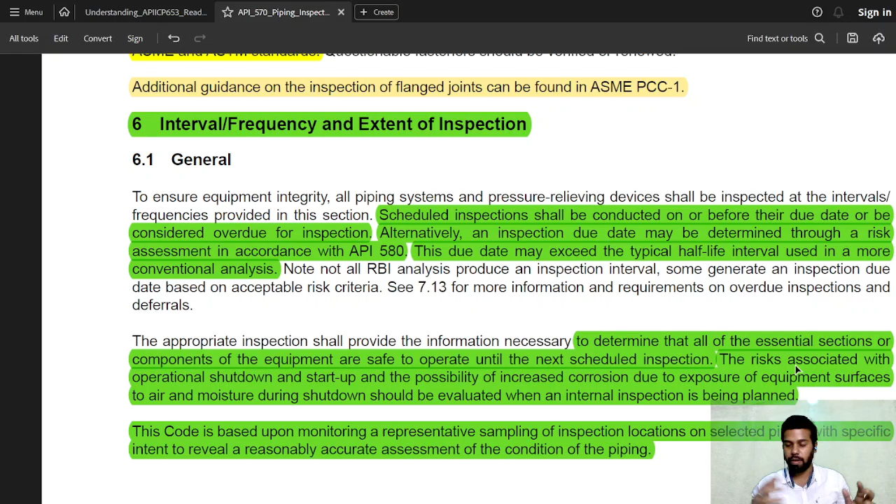The appropriate inspection shall provide the information necessary to determine that all of the essential sections or components of the equipment are safe to operate until the next inspection cycle. The risk associated with operational shutdown, startup schemes, and possibility of increased corrosion due to exposure of equipment surfaces to air, moisture, soil, or anything else, should be evaluated during the internal inspection. This code is based upon monitoring and representative sampling of inspection locations on the selected piping to reveal a reasonably accurate assessment of the condition of the piping system.

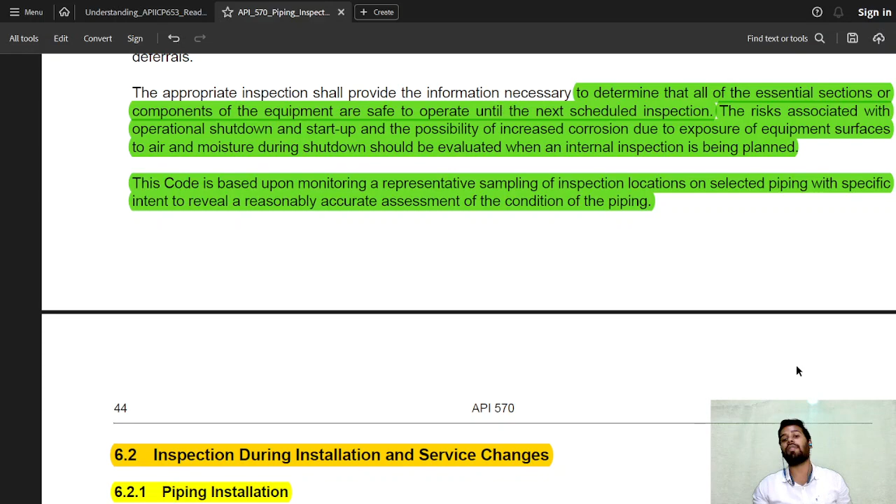Inspection during installation and service changes. Whenever the pipe is getting installed, first we have to check it, because this will be considered the original condition of the pipe, and whatever degradation happens later on will be assessed by comparing the original condition at installation with the condition after some years of service. The original inspection is very important. It initiates plant inspection records.

Piping shall be inspected in accordance with the code of construction requirements at the time of installation, because at the time of installation it is not an in-service pipe, it is a new pipe which is generally governed by the construction code. In most cases for pressure piping, it will be B31.3.

The purpose of installation inspection is to verify that the pipe is clean and safe for operation. To initiate plant inspection records for the piping system, the minimum installation inspection should include: verifying that the pipe is installed correctly, correct metallurgy is used, supports are adequate and secured, exterior attachments such as supports, shoes, hangers are secured, insulation is properly installed, flanged and other mechanical connections are properly assembled, and the piping is clean and dry for operation. We also need to verify the pressure relieving devices satisfy the design requirements - that is, correct devices used, correct set pressure, etc., and they are properly installed.

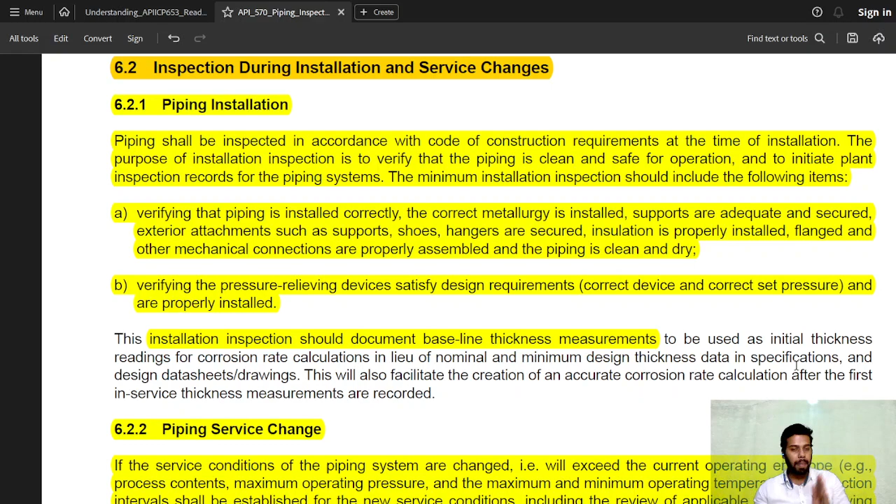Next is piping service change. If the service conditions of the piping systems are changed, that is, will exceed the current operating envelope - process contents, maximum operating pressure, maximum minimum operating temperatures - inspection interval shall be established for the new service conditions, including the review of the applicable pressure relieving device settings.

If both ownership and the location of the piping are changed, the piping shall be inspected before it is reused. Also, allowable service conditions and inspection interval shall be established for the new service.

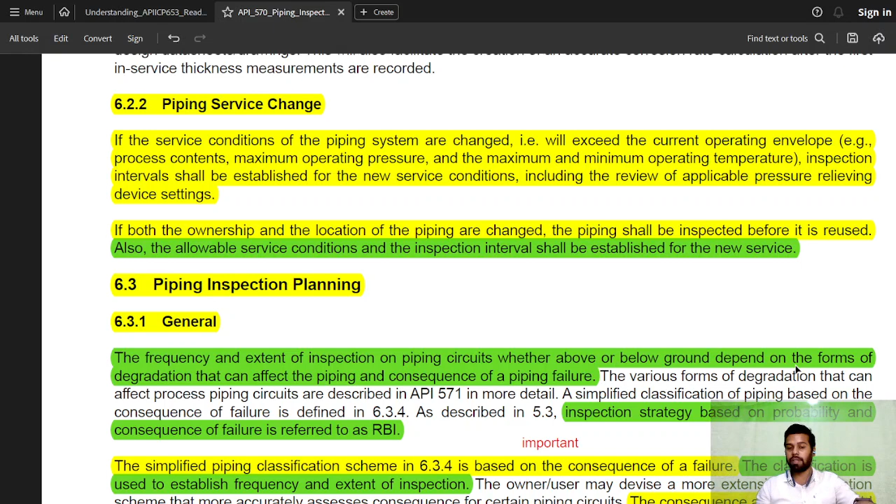Next is piping inspection planning. Obviously, before doing anything, planning is important, because if you don't do planning, then we are just shooting in the dark. Planning is always important so that you can understand whether your planning stage assumptions were properly identified and controlled or not.

So the frequency and extent of inspection on a piping circuit, whether above or below the ground, depends on the forms of degradation that can happen on the piping and the consequence of the piping failure. So what kind of damage mechanisms are associated with that piping system, and what would happen if the loss of containment happens? The inspection strategy based on the probability and consequence of failure is known as the risk-based inspection approach.

The simplified pipe classification scheme in 6.3.4 is based on the consequence of failure. The classification is used to establish frequency and extent of inspection. The consequence assessment would consider potential for explosion, fire, toxicity, environmental impact, and other potential effects associated with the failure or loss of containment.

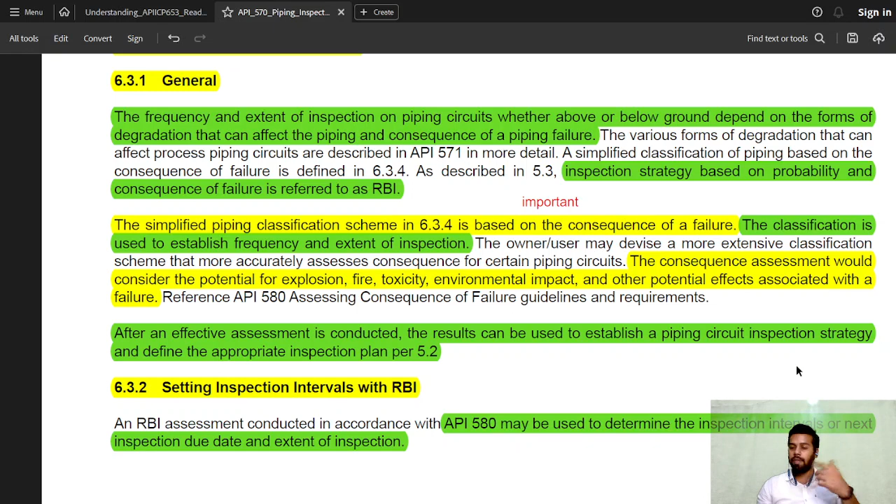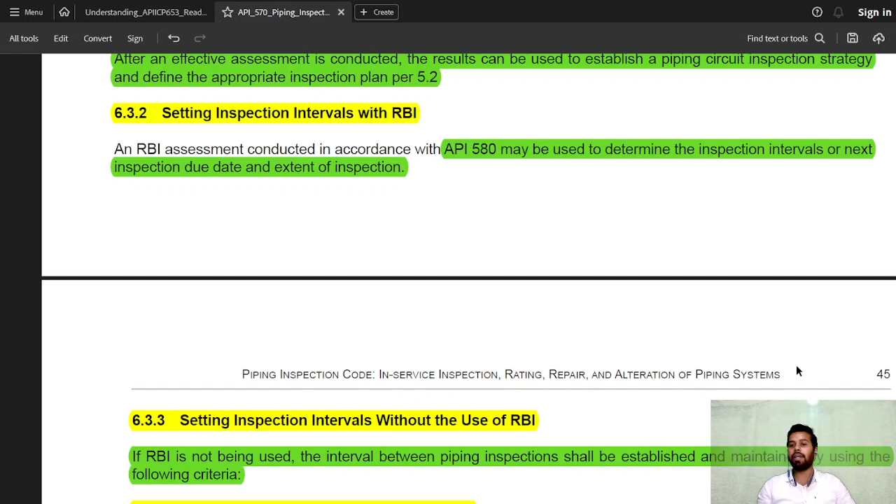After an effective assessment is conducted, the results can be used to establish a piping circuit inspection strategy and define the appropriate inspection plan as per 5.2. Setting up RBI, you can use a risk-based assessment. Whenever we are using risk-based assessment, we have to look at the recommendations given by API 580, and that is how we identify what will be the next inspection interval or the next inspection due date and the extent of inspection required.

If we don't do RBI, if we don't have any risk assessment, then the interval between piping inspections shall be established and maintained using the following criteria: corrosion rate and remaining life calculation, piping service classification, and applicable jurisdictional requirement.

It is also based on the judgment of the inspector, piping engineer, piping supervisor, and material specialist, based on the operating condition, previous inspection history, current inspection results, and conditions that are warranted for supplemental inspections covered in 5.5.

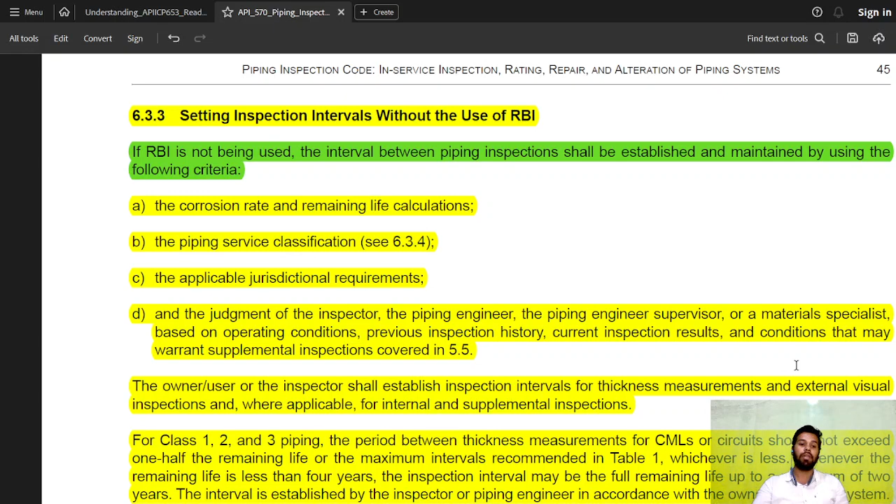Owner, user, or inspector shall establish the inspection interval for thickness measurement and external visual inspection, where applicable, for internal and supplementary inspections. For class 1, 2, 3 piping, the period between thickness measurements for a CML or circuit should not exceed half of the remaining life or the maximum intervals recommended in table 1, whichever is less. So this is table 1.

Let's imagine if you have a fluid flowing inside your piping that is at auto-ignition temperature and it is located in a residential area or a high activity area, then the consequence of failure is very high. In that case, we might consider it class 1. So the more risky it is, the more severe the classification is going to be.

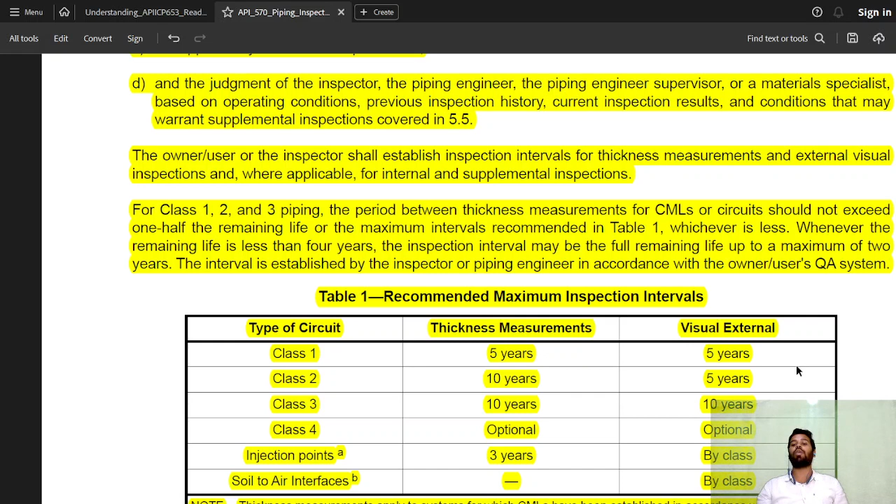Whenever the remaining life is less than 4 years, the inspection interval may be the full remaining life up to a maximum of 2 years. The inspection interval is established by the inspector or piping engineer in accordance with the owner/user's quality assurance program. So this is the table, we'll talk about this table later on.

The maximum intervals for class 4 are left to be determined by the owner user based on reliability, business needs, and jurisdictional requirement. For piping in non-continuous service, the inspection interval between thickness measurements may be based upon the number of years of actual service instead of calendar years.

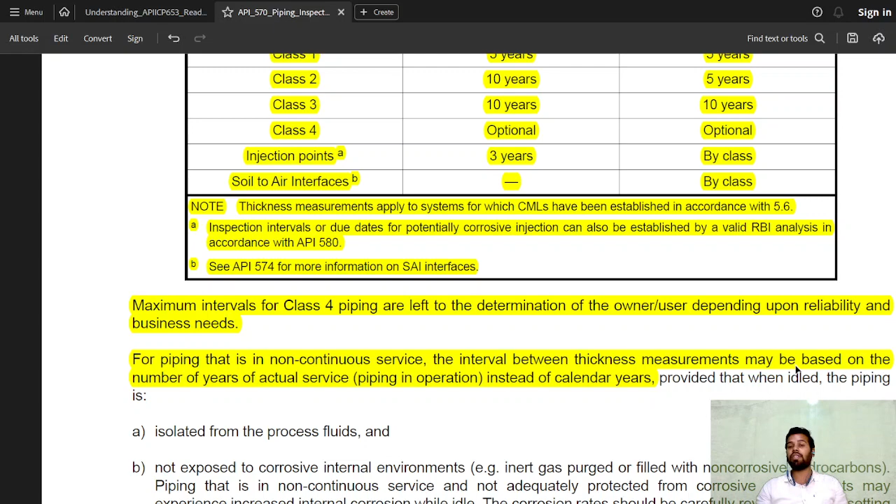The inspection interval shall be reviewed and adjusted as necessary after each inspection or significant change in operating conditions or inspection results. General corrosion, localized corrosion, pitting, environmental cracking, and other applicable forms of deterioration mentioned in 5.5 -- we have seen in 5.5 various kinds of damage mechanisms the piping is subjected to -- and API 571 shall be considered when establishing the various inspection intervals.

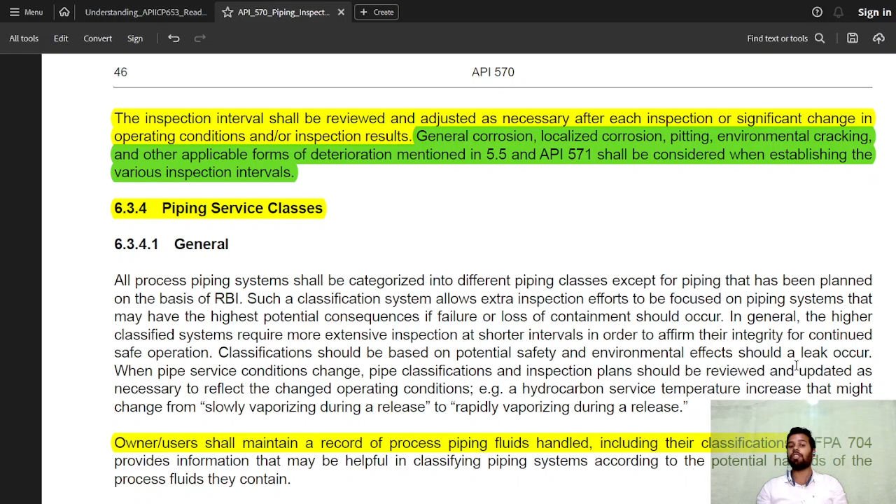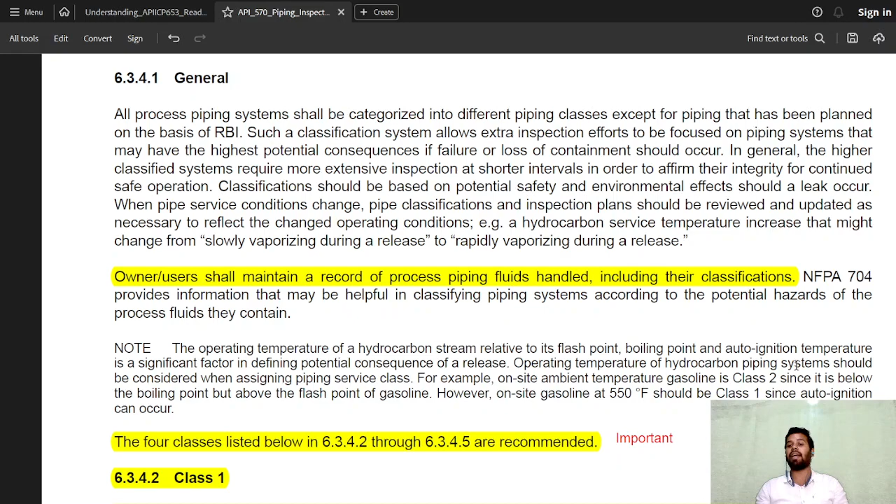Next, what are the service classes of a pipe? The owner user shall maintain a record of process piping fluids handled, including their classifications. There are 4 classifications listed here. Class 1 is going to be the most dangerous piping if the failure happens.

Services with the highest potential of resulting in immediate emergency should the leak occur are in class 1. Class 1 includes flammable services that auto-refrigerate and lead to brittle fractures, pressurized services that rapidly vaporize forming an explosive mixture such as C2, C3, C4 streams, and fluids that rapidly vaporize, those with atmospheric boiling temperatures or where the atmospheric boiling point is below the operating temperature.

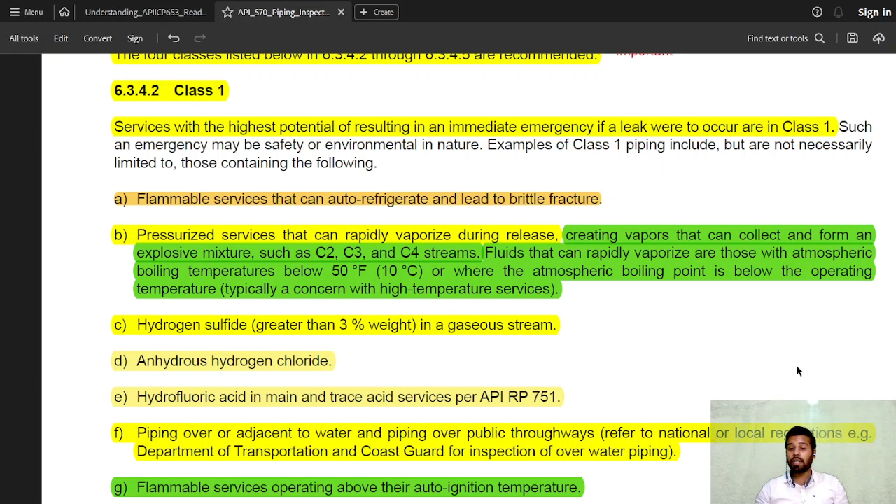Hydrogen sulfide greater than 3% weight in a gaseous stream, anhydrous hydrogen chloride, hydrofluoric acid, piping over or adjacent to water or public throughways, flammable services operating above its auto ignition temperature - all of these will be considered class 1 piping, which is very risky.

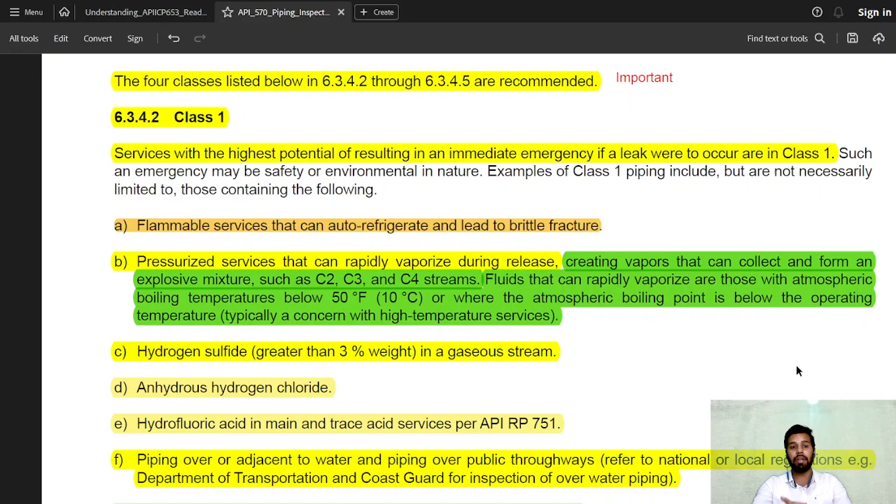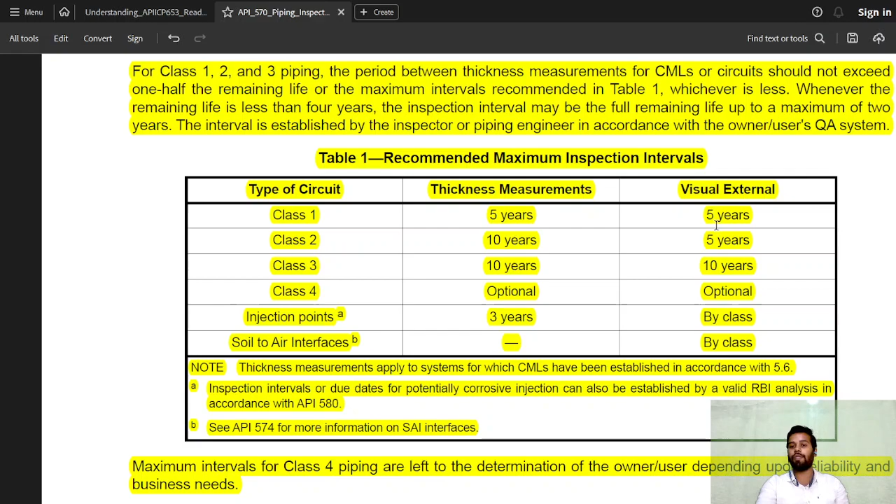The thickness monitoring for class 1 is once in 5 years, and external visual inspection also needs to be done once in 5 years. This is given in table 1. So in table 1, class 1 is 5 years for thickness measurement and 5 years for visual inspection. So once in 5 years we might need to do this for class 1.

Class 2 is not as dangerous as class 1, but again it is dangerous. Services that are not included in other classes are in class 2. This classification includes the majority of unit process piping and selected offsite piping. Examples of these services are on-site hydrocarbons that slowly vaporize during release, operating below the boiling point but above the flash point, on-site hydrogen, fuel gas, natural gas. On-site acids and caustics are also in class 2.

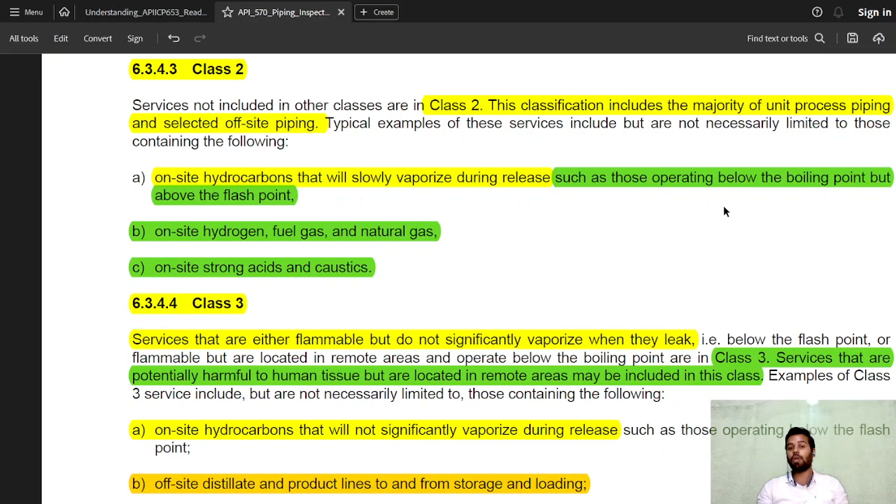In class 2, thickness monitoring will be once in 10 years and external visual inspection will be once in 5 years. So thickness monitoring 10 years, visual inspection 5 years.

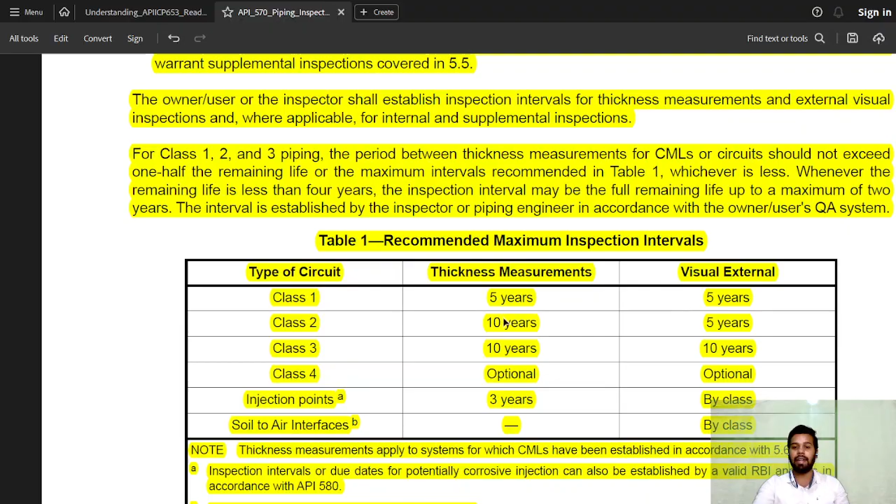Next is class 3 pipe. Class 3 is again not as dangerous as class 1 and class 2, but it is dangerous, located in a very low activity area. So services that are either flammable but do not significantly vaporize when leaked, below flashpoint, or flammable but located in remote areas and operating below the boiling point are in class 3.

Services that are potentially harmful for human tissues but located in remote areas may also be included in this class. Examples of this are on-site hydrocarbons that do not significantly vaporize, off-site distillate product lines to and from storage and loading, tank farm piping, off-site acids and caustics, off-site hydrogen, fuel gas, natural gas, and other low-risk hydrocarbon piping that does not fall into categories of class 1, 2, and 4.

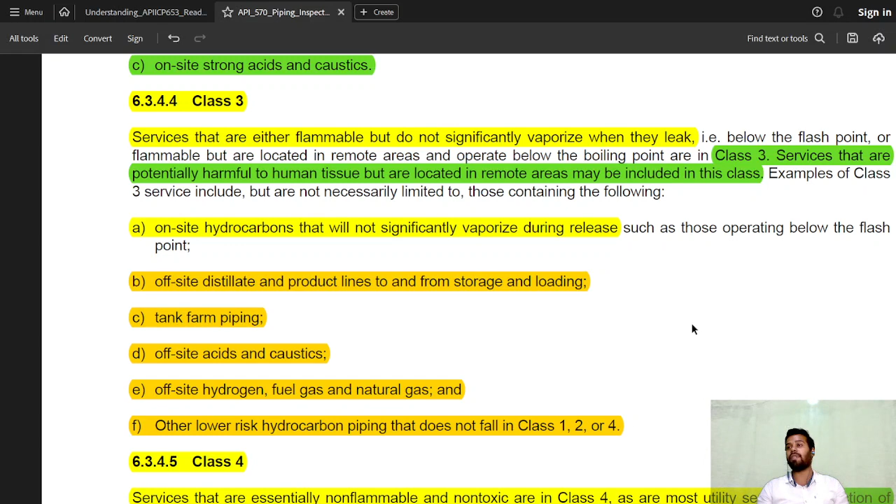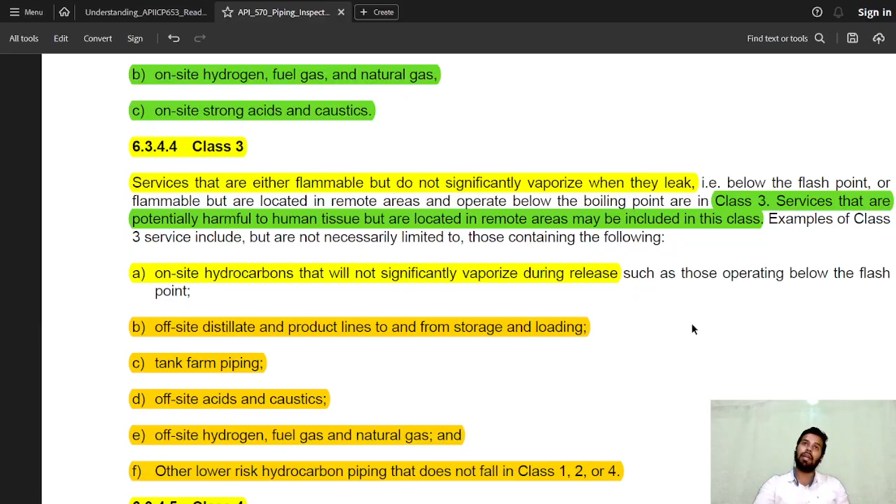Next is class 4. In class 3, thickness monitoring is once in 10 years, and external visual inspection is also once in 10 years. So in table 1, class 3 is once in 10 years and visual is also once in 10 years.

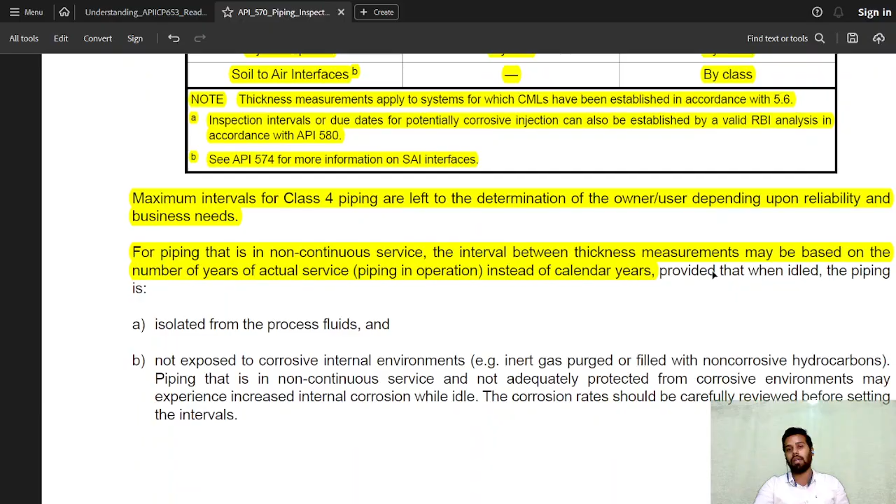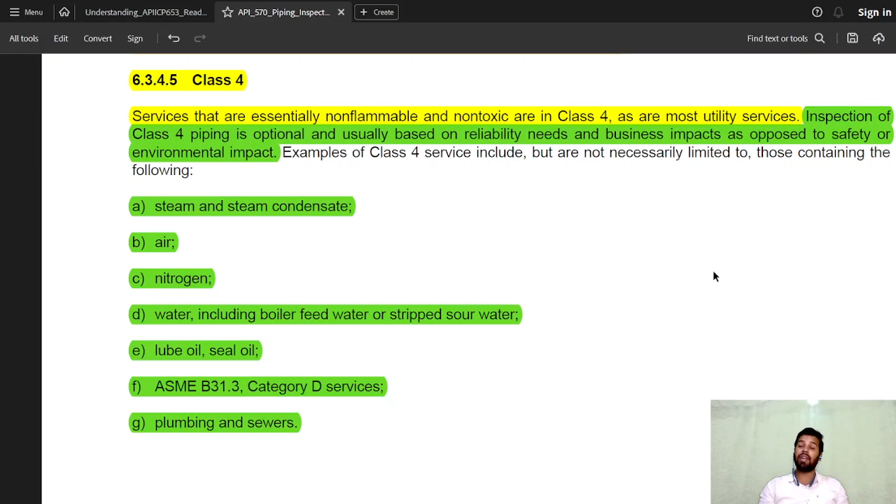Class 4 piping is generally non-toxic and non-flammable. Services that are essentially non-toxic and non-flammable are in class 4, as are most utility piping services. Inspection of class 4 is optional and usually based on reliability needs and business impacts as opposed to safety or environmental impact. Examples of class 4 piping are steam condensate, air, nitrogen, water, boiler feed water, stripped sour water, lube oil, seal oil, ASME B31.3 category D services, plumbing and sewer lines. So all of these are in class 4.

So there are 4 classes of piping systems which are recommended by API 570.

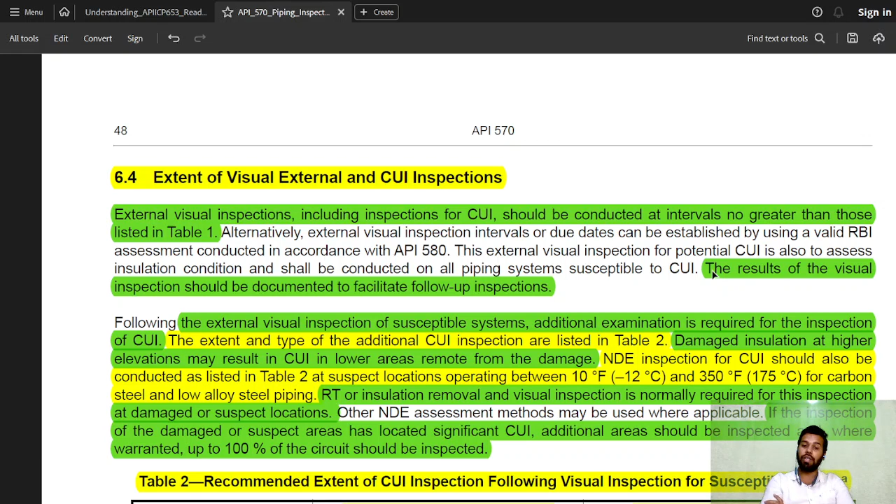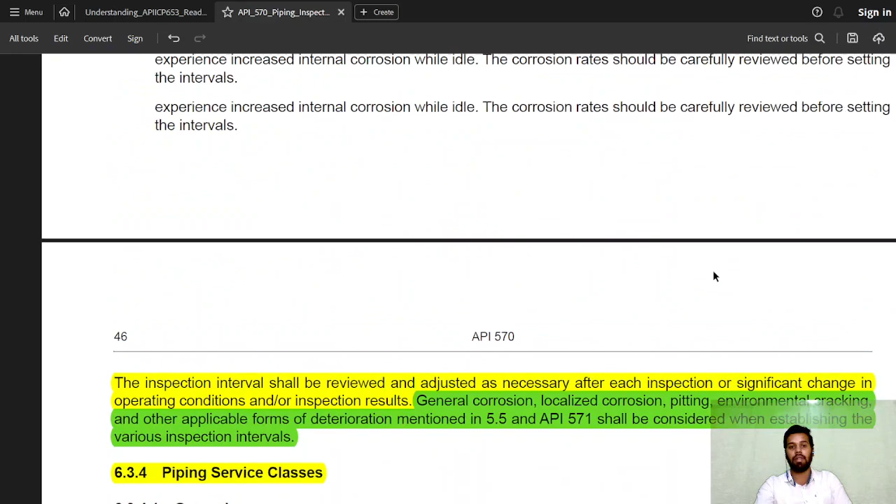Next, extent of visual, external and CUI inspections. The external visual inspection, including inspection of corrosion under insulation, should be conducted at an interval no greater than those listed in table 1. So in table 1, CUI inspection is also given - this table we use for corrosion under insulation as well.

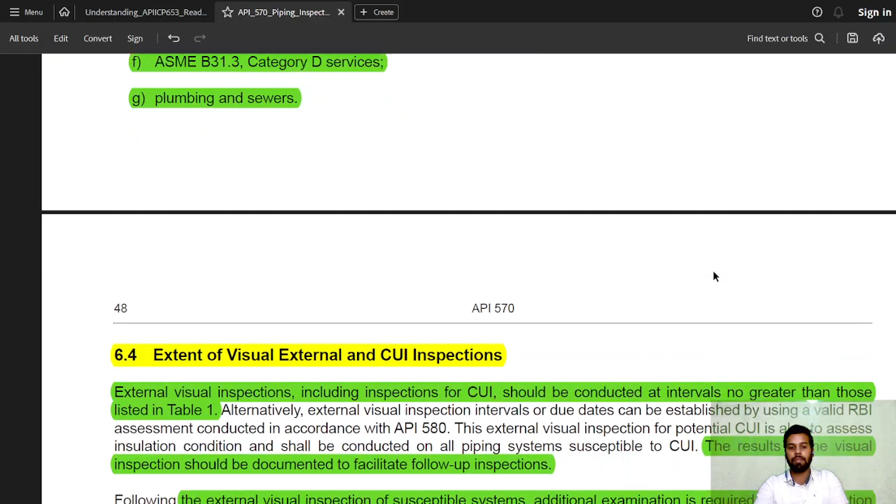The results of visual inspection should be documented to facilitate follow-up of inspection. For external inspection of susceptible systems, additional examination is required. For inspection of corrosion under insulation, the extent and type of additional CUI inspection is listed in table 2.

Damaged insulation at higher elevations may result in CUI at lower areas remote from the damage. Non-destructive examination of corrosion under insulation should be conducted as listed in table 2 at suspected locations operating between minus 12 degrees Celsius to 175 degrees Celsius for carbon steel and low alloy steel piping.

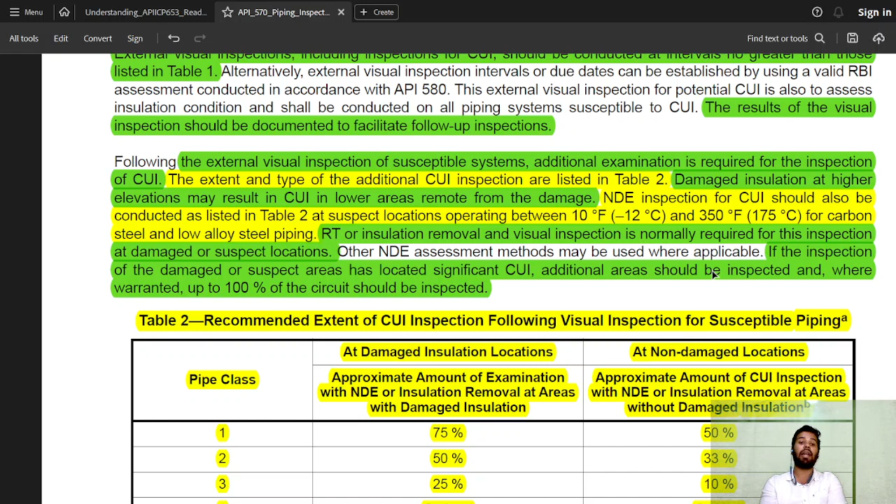RT or insulation removal and visual inspection is normally required for this kind of inspection at damaged or suspected locations, because in most cases when you check the insulation it seems fine, but there can be damage below it. For that, insulation removal might be required, or you can simply do RT instead. If inspection of damaged or suspected areas has located significant corrosion under insulation, additional area should be inspected where warranted, and up to 100% of the circuit should be inspected.

So these are the tables. For class 1, at damaged insulations, the approximate amount of non-destructive examination or insulation removal at areas with damaged insulation is 75%, and non-destructive examination has to be done. At non-damaged areas, 50% of insulation must be removed and non-destructive examination should be done. For class 1, class 2, class 3, class 4, a significant decrease in insulation removal can be seen. For class 4, it is generally optional.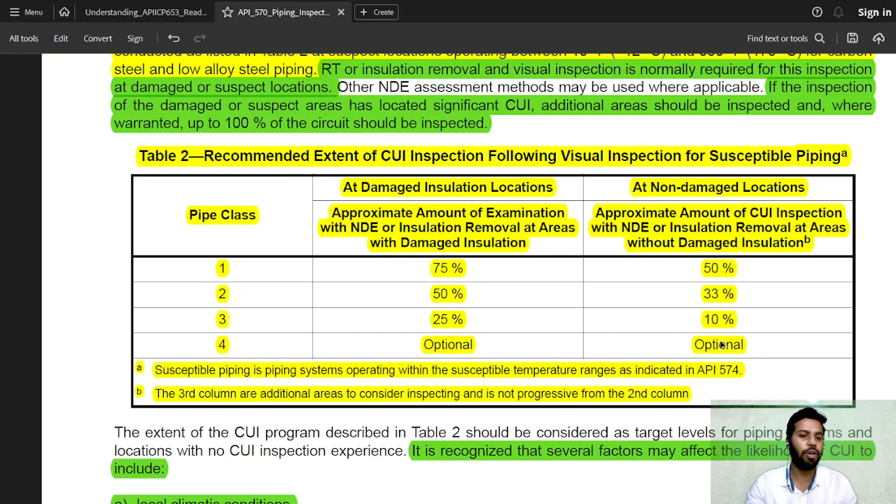It is recognized that several factors may affect the likelihood of corrosion under insulation, including local climatic conditions, insulation design and maintenance, coating quality, and service conditions. Facilities with CUI inspection experience may increase or reduce CUI inspection targets of Table 2. An exact accounting of CUI inspection targets is not required. Owner-user may confirm inspection targets with operational history and other documentation.

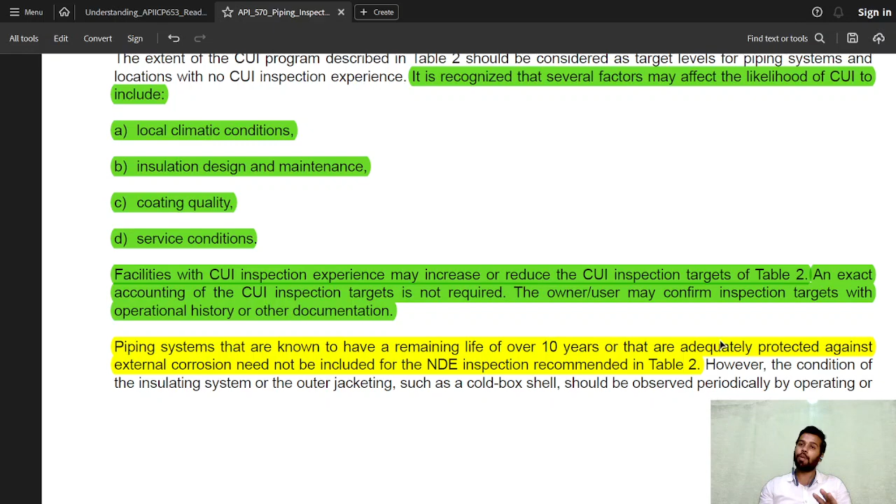Piping systems that are known to have a remaining life of over 10 years, or that are adequately protected against external corrosion, need not be included for the non-destructive examination recommended in Table 2. So any pipe having a remaining life greater than 10 years, or that is adequately protected, need not use Table 2.

Extent of thickness measurement, inspection and data analysis. CML monitoring - we already know CML is condition monitoring location, specific areas where inspection needs to be carried out. To satisfy inspection interval requirements, each thickness measurement inspection should obtain thickness readings on a representative sampling of the total number of CMLs on each circuit. This representative sampling should include data for various types of components and orientations found in the circuit.

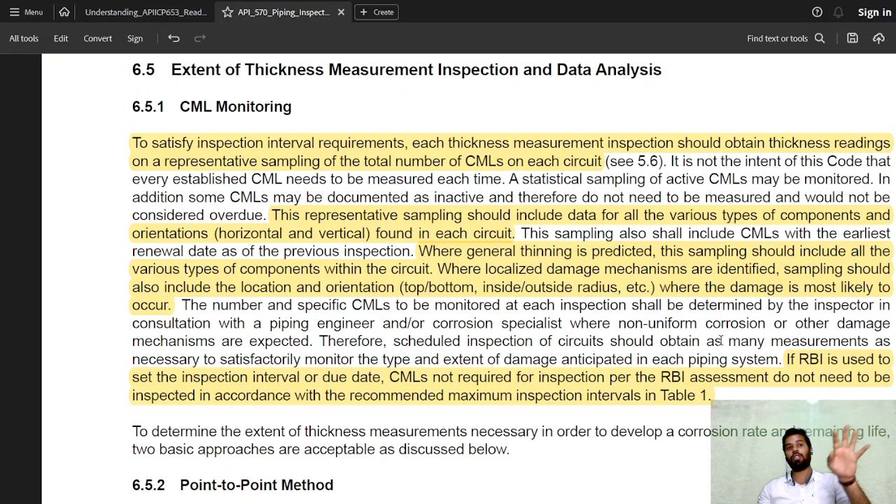When general thinning is predicted, the sampling should include various types of components within the circuit. Where localized damage mechanisms are identified, the sampling should also include the location and orientation where the damage is most likely to occur. If RBI is used to set inspection intervals or due dates, CMLs assessed as per RBI do not need to be inspected in accordance with the recommended maximum intervals of Table 1. So when RBI is used, find the frequency through RBI; if RBI is not used, then Table 1 should be the inspection interval.

Next is analysis - the point-to-point method, where the corrosion rate, remaining life and re-inspection interval are determined for each individual CML. Future inspections are managed based on the worst-case half-life established at each CML. This method can lead to significant or frequent inspections of the same piping systems if not carefully managed.

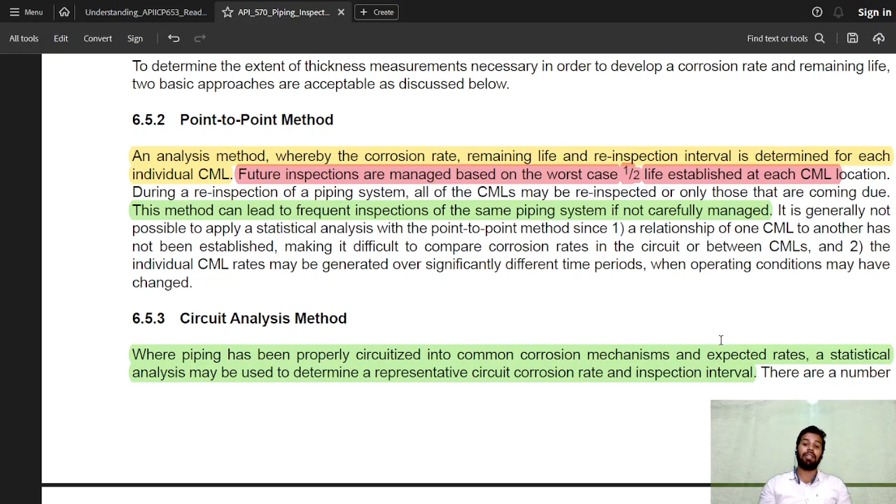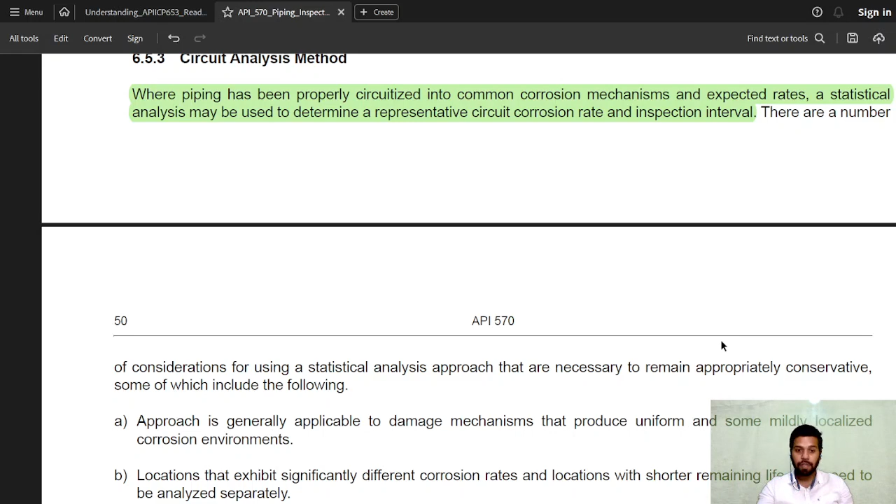Next is the circuit analysis method. Here we generally consider one circuit to be more dangerous and identify it accordingly. For piping properly circuitized into common corrosion mechanisms and expected rates, a statistical analysis may be used to determine the representative circuit corrosion rate and inspection interval. There are a number of considerations for a statistical analysis approach that are necessary to remain appropriately conservative.

Some considerations include: the approach is generally applicable to damage mechanisms that are uniform and some mildly localized corrosion. Locations that exhibit significantly different corrosion rates, or locations with shorter remaining life, may need to be analyzed separately. Sampling statistics should be considered to check the statistical confidence factor given the variability of the dataset. The number of data points, i.e. CML inspections, may need to be adjusted to achieve the desired statistical confidence before employing a statistical methodology. A safety factor or confidence interval, which may depend on the expected damage mechanism, may additionally account for circuit complexity and should be considered to account for uncertainties such as measurement error and overall failure risk.

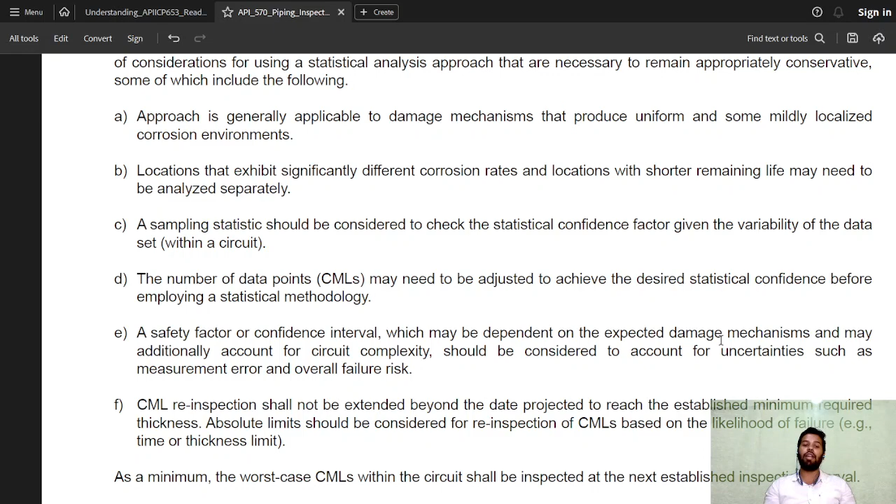CML re-inspection shall not be extended beyond the date projected to reach the established minimum required thickness. Absolute limits should be considered for re-inspection of CML based on the likelihood of failure. As a minimum, the worst case CML within the circuit shall be inspected at the next inspection interval.

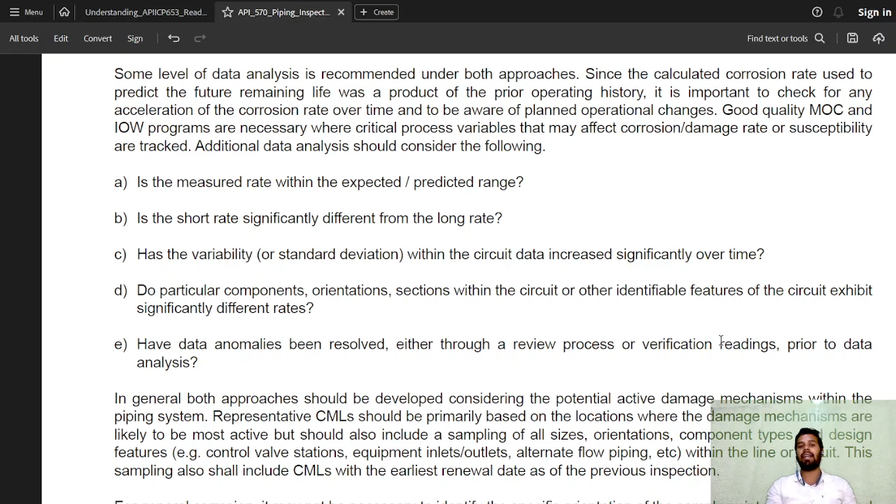Some data analysis needs to be done. Some level of data analysis is recommended under both approaches, since the calculated corrosion rate used to predict future remaining life was a product of prior operating history. It is important to check any acceleration in the corrosion rate over time and be aware of planned operational changes. Good quality management of change and integrity operating window programs are necessary where critical process variables that may affect corrosion or damage rate and susceptibility are tracked.

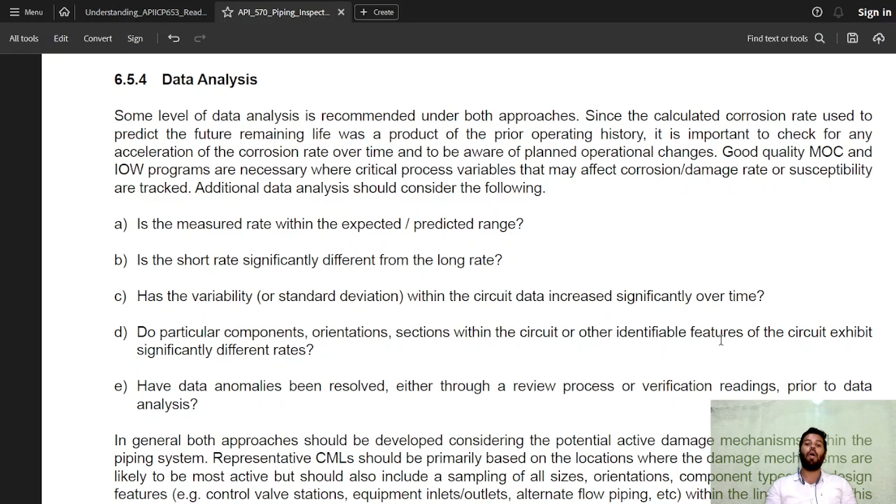So the following data might need to be considered: the measured rate versus expected or predicted range; whether short rate is significantly different from long rate corrosion; has variability within the circuit increased significantly over time? Do particular components, orientation, sections within the circuit, or identifiable features of the circuit exhibit significantly different rates? Have data anomalies been resolved either through a review process or verification reading prior to data analysis?

Next is extent on small bore piping, dead legs, auxiliary piping, and threaded connections. Small bore piping are basically very small piping, generally less than 2 inches diameter. SBP as primary process piping shall be inspected in accordance with the requirements of this document.

As with large diameter piping, the inspection practices for SBP shall take into consideration the damage mechanisms that are listed in API 571, other than just wall thinning.

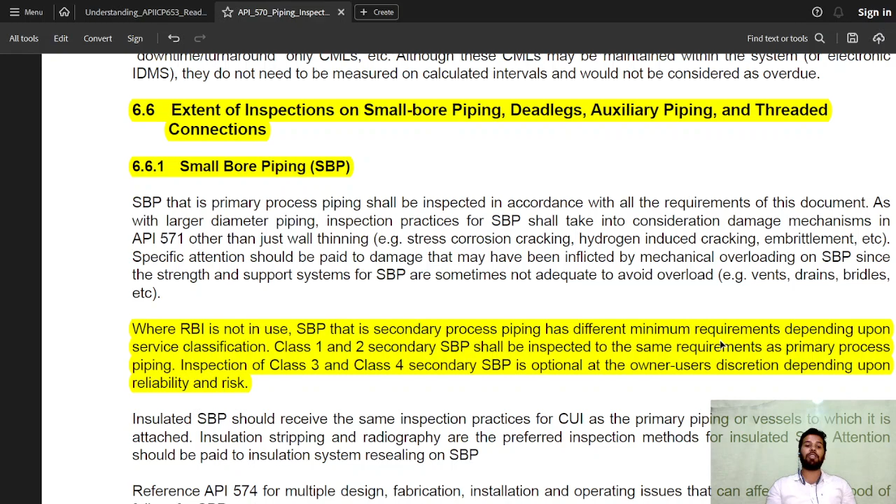When RBI is not used, the SBP secondary process piping has different minimum requirements depending on the service classification. Class 1 and Class 2 secondary SBP shall be inspected with the same requirements as primary process piping. Inspection of Class 3 and Class 4 secondary piping is optional, at the owner or user's discretion, depending upon the reliability and risk of that SBP.

Next is dead leg inspection. A dead leg is basically where the flow is significantly lower or halted. Dead legs include both large bore and small bore piping, and can require special attention if deemed potentially corrosive by a corrosion specialist, because of the accumulation of contaminated water, solid material, different temperatures from the main line, or accumulation or concentration of corrosive species.

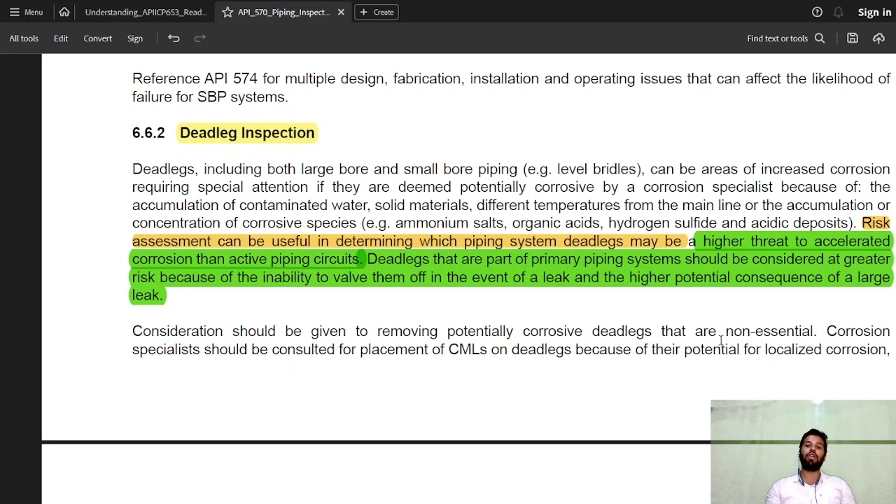Risk assessment can be useful in determining which piping system dead legs may be a higher threat for accelerated corrosion than active piping circuits. Dead legs that are part of a primary piping system should be considered at greater risk because of the inability to valve them off in the event of a leak, and the higher potential consequence of a larger leak.

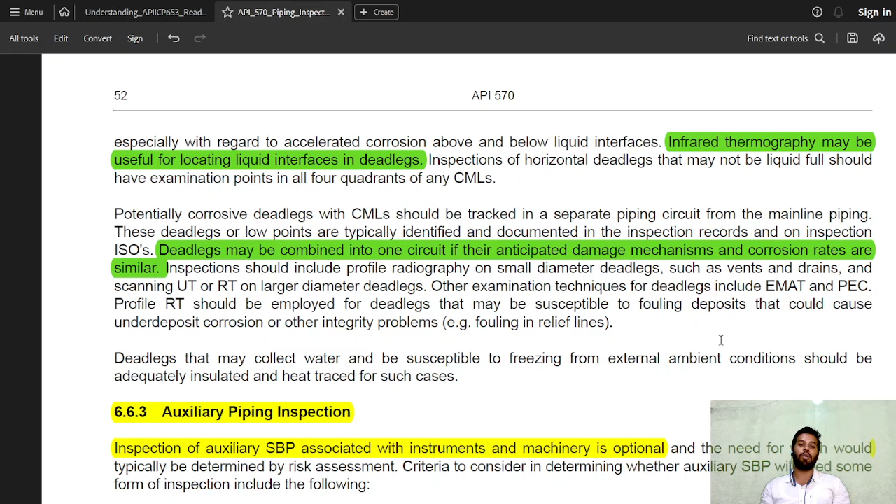Infrared thermography may be useful for locating liquid interfaces in the dead legs. Dead legs may be combined into one circuit if their anticipated damage mechanisms and corrosion rates are similar. Inspection should include profile radiography on small diameter dead legs such as vents and drains, and scanning UT or RT for larger diameter dead legs. Other examination techniques might include EMAT, PEC, or profile radiography, which should be employed in dead legs that may be susceptible to fouling deposits that could cause under-deposit corrosion and other integrity problems.

Auxiliary piping: the inspection of auxiliary SBP associated with instruments and machinery is optional, depending on the discretion of the owner, user, and risk assessment. You might do it, you might not. The criteria to consider whether the auxiliary SBP should be inspected will depend on piping classification, potential for environmental and fatigue cracking, potential for corrosion based on experience with adjacent primary systems, potential for CUI, and potential for fatigue, erosion, corrosion on thermowells.

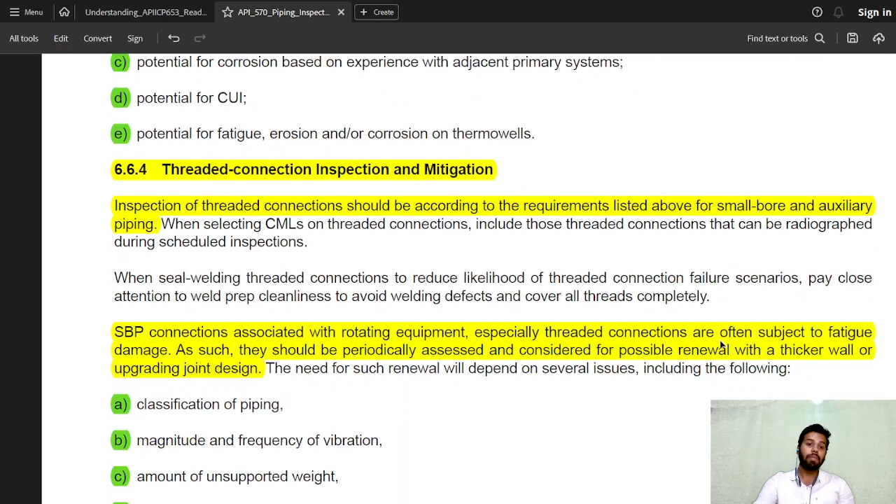Threaded connections, inspection and mitigation. The inspection of threaded connections should be in accordance with the requirements listed above for small bore piping and auxiliary piping. Seal welding threaded connections to reduce the likelihood of thread connection failure scenarios may require close attention to weld prep cleanliness, to avoid welding defects and cover all threads completely.

Sometimes when the threading is done, additional welding is done so that whenever a leak happens, it would not go through, or thread failure would not happen. So once the threading is done and the pipe is connected, welding is done so that these thread connections become permanent.

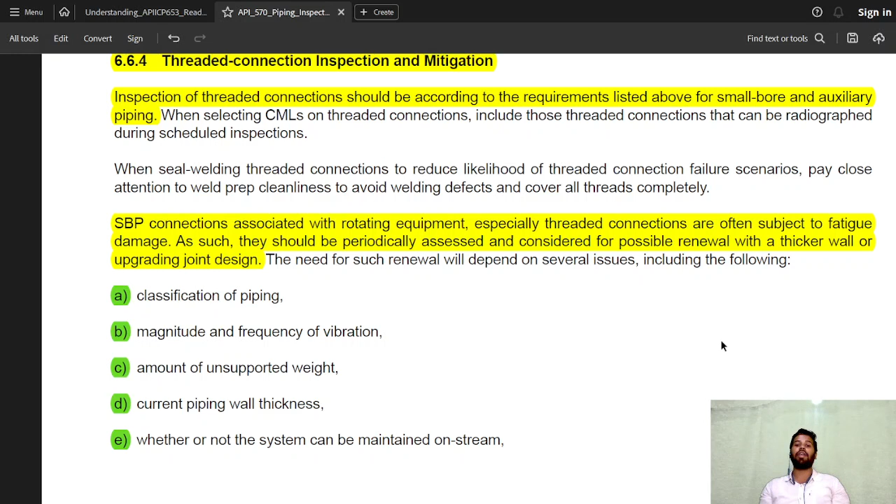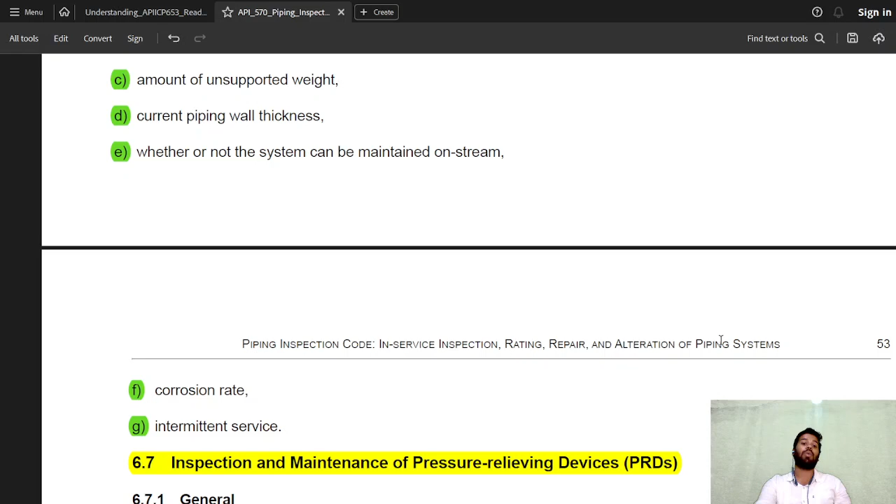The SBP connections associated with rotating equipment, especially threaded connections, are often subjected to fatigue damage. As a result, they should be periodically assessed and considered for possible renewal with a thicker wall or upgraded joint design. The need for such renewal depends on several issues: classification of the piping, magnitude and frequency of vibration, the amount of unsupported weight, current piping wall thickness, whether or not the pipe system can be maintained on stream, corrosion rate, intermittent service, etc.

Inspection and maintenance of pressure relieving devices. Whenever we talk about pressure relieving devices, the recommendations are always given in API 576. Pressure relieving devices can be tested and repaired by a repair organization experienced with pressure relieving device maintenance. PRDs should be inspected, tested, and maintained in accordance with API 576.

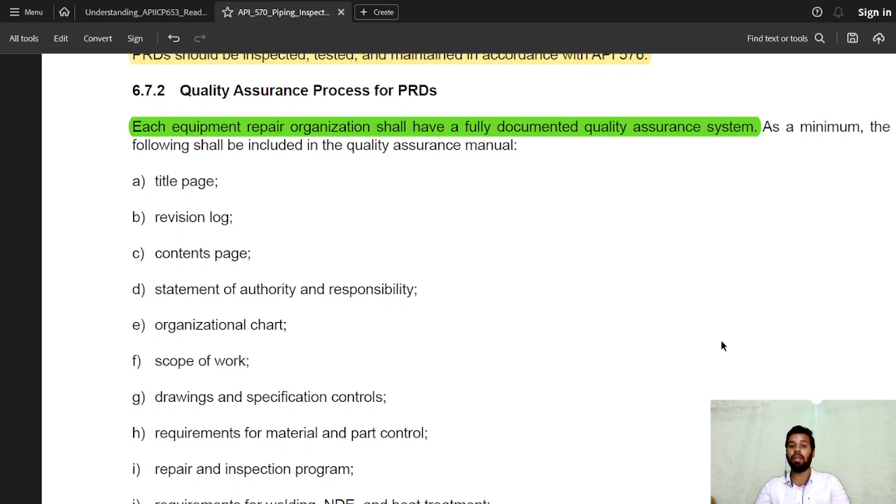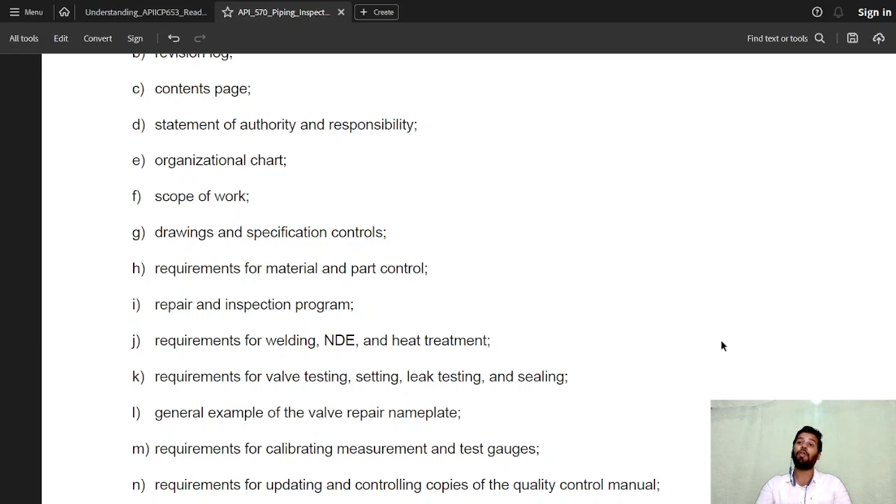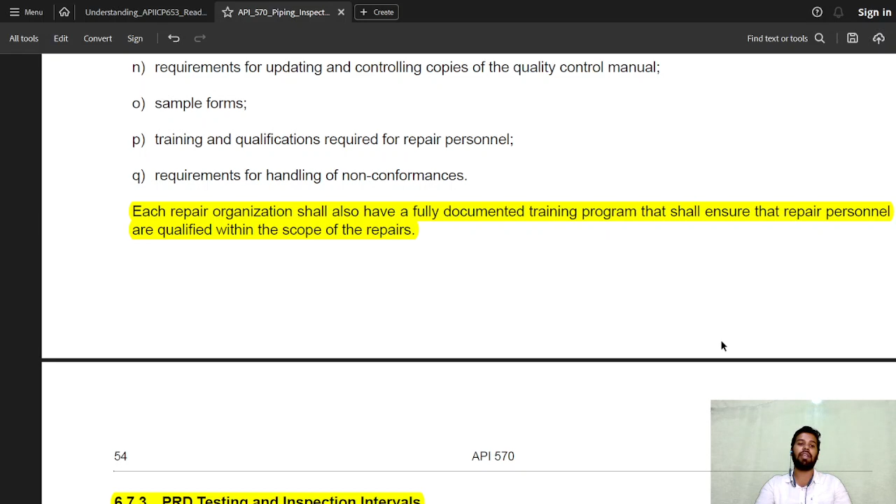Quality assurance program: for PRDs, each equipment repair organization shall have a fully documented assurance program. As a minimum, the following things are to be included in the quality assurance manual: title page, revision log, content page, statements of authority, responsibility, and organizational chart. These are the things that should be included when making a quality assurance manual for pressure relieving device inspection and repair. Each repair organization shall also have a fully documented training program that ensures repair personnel are qualified within the scope of the repairs.

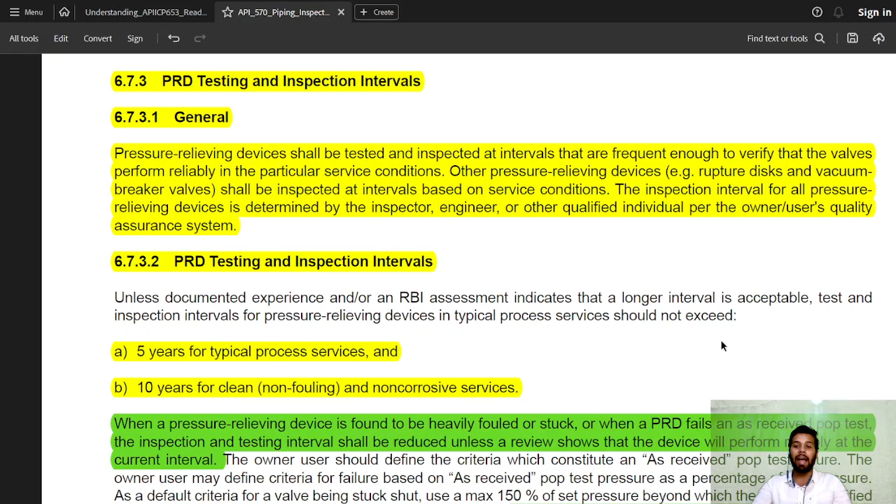Testing and inspection of pressure relieving devices: the pressure relieving devices shall be tested and inspected at intervals frequent enough to verify that the valves perform reliably in a particular service condition. Other pressure relieving devices, such as rupture discs and vacuum breaker valves, shall be inspected at intervals based on the service condition. The inspection intervals for all pressure relieving devices are determined by the inspector, engineer, or other qualified individual as per the owner-user's quality assurance system.

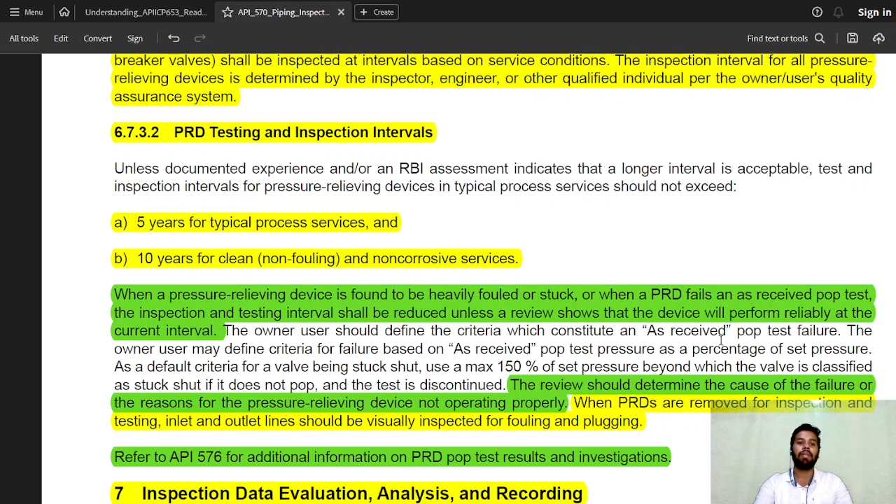Now, PRD testing, and pressure relieving device testing and inspection intervals: unless documented experience or an RBI assessment indicates that longer intervals are acceptable, the test interval should be based on, and should not exceed, 5 years for typical processes and 10 years for clean, non-fouling, and non-corrosive services.

When a pressure relieving device is found to be heavily fouled or stuck, or when pressure relieving devices fail an as-received POP test, the inspection and testing interval shall be reduced unless a review shows that the device will perform reliably at the current interval. What a POP test is, and when it is to be done, we'll talk about later when we go ahead with the pressure relieving device document, API 576. For now, we just need to understand that whenever there is evidence that the pressure relieving device is stuck, fouled, or corroded, you might need to do inspection, review it, check it, repair it, or even replace it.

The owner-user should define the criteria constituting an as-received POP test failure. The owner-user may define the criteria for failure based on as-received POP test pressure as a percentage of set pressure. The default criteria for a valve being stuck shut is at max 150% of the set pressure, beyond which the valve is classified as stuck shut. If it does not pop, the test is discontinued. The review should determine the cause of failure or the reasons pressure relieving devices are not operating correctly.

When pressure relieving devices are removed for inspection and testing, the inlet and outlet lines should be visually inspected for fouling and plugging. Again, we need to check API 576 for all the details required for pressure relieving device inspection.